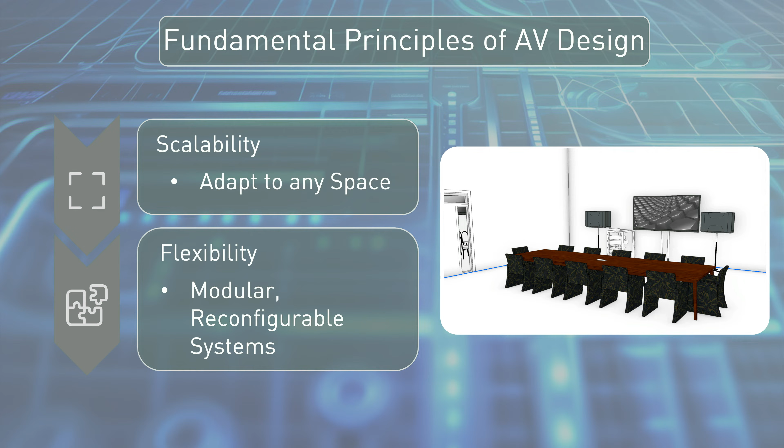When designing AV systems, two key principles stand out: scalability and flexibility. Scalability means systems must adapt to different needs and environments. For example, a facility with multiple rooms and configurations might need setups that work for both small gatherings and large services. Flexibility is about creating modular systems. This allows components to be easily added, removed, or reconfigured as needs change. For instance, a hotel ballroom might need different setups for a business conference versus a wedding reception. The focus is on creating an engaging, cohesive experience. This means ensuring all components, audio, video, and lighting, work together seamlessly regardless of the event's scale or nature.

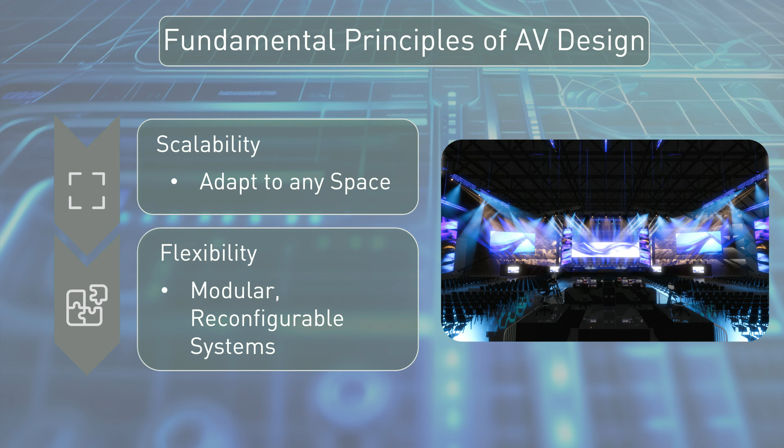An AV system typically includes three main components: lighting, video, and audio. For a seamless user experience, transitions between these components are crucial. This is where timecode can come into play, ensuring all elements are perfectly synchronized. The goal is to create a unified experience where no single component draws attention to itself unless intentionally designed to do so. In some scenarios, these systems may include custom elements like automation or the ability to broadcast and network out of the room they originate.

The design process starts with understanding the client's vision and goals. This involves in-depth discussions about what they want to achieve. Is the priority the best sound quality possible, or is the visual impact more important? Once the vision is clear, designers consider how the content will be consumed. Is it for an in-person audience, or will it be broadcast? This affects decisions about camera placement, lighting design, and audio setup.

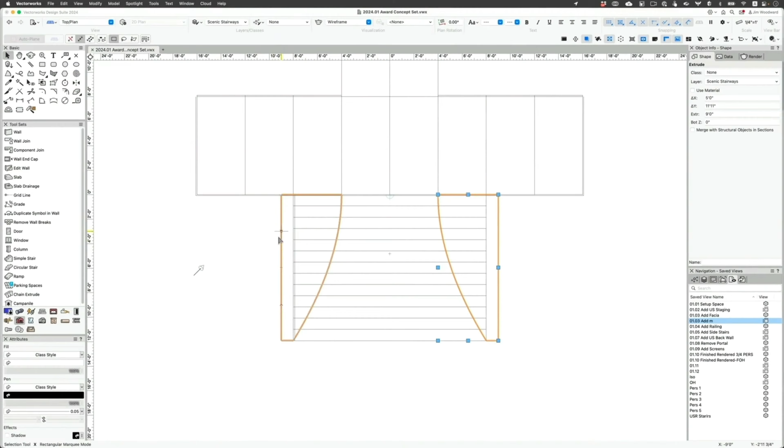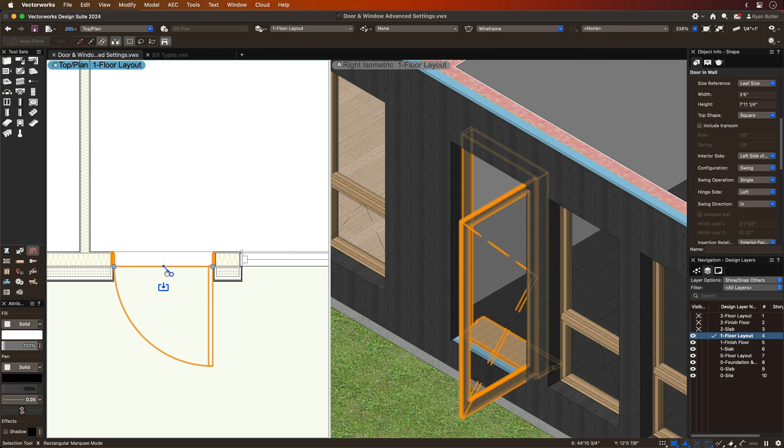In the AV design industry, professionals use a variety of software tools for visualization and documentation. Designers often work with multiple collaborators across different design and documentation platforms. For example, Vectorworks is a comprehensive software that offers robust tools for 2D drafting, 3D modeling, BIM, and rendering, catering to the needs of many types of designers across many disciplines. Vectorworks offers a hybrid 2D/3D environment that allows for precise planning and visualization. One of its key strengths is the ability to import and export IFC, Industry Foundation Classes, data, enabling seamless collaboration between architects and other design professionals. This ensures that AV systems integrate smoothly with the overall building design.

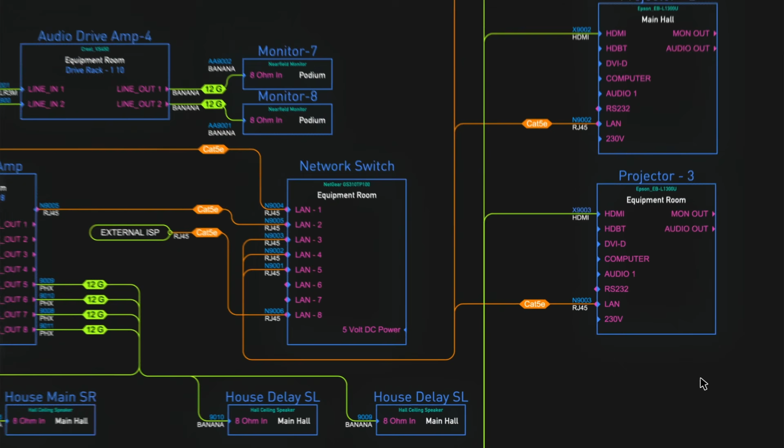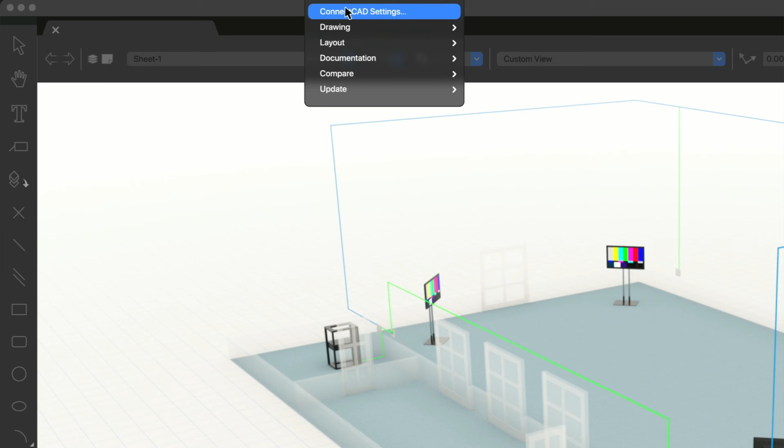For systems integrators, the ConnectCAD add-on in Vectorworks Spotlight is particularly valuable. It can generate essential paperwork and schematics, streamlining the documentation process. ConnectCAD also leverages certain IFC data, allowing for detailed system designs that account for the building's structural and spatial constraints. The design process is ongoing and collaborative. It involves frequent discussions between the designer, the client, and the systems integrators. This teamwork ensures the final product matches the client's vision, is technically possible, and stays within budget.

To stay current, professionals attend trade shows, read industry publications, and network with peers. This helps them to adapt to new technologies and trends in AV design, which are constantly evolving. The AV industry is always changing, but the core remains the same: enhancing human communication through audio and visual means. Being a proponent of your craft is crucial. Find 2 or 3 other people in your same area of expertise and start communicating. Discuss what's challenging, what's easy, and share your discoveries. This collaboration helps prevent reinventing the wheel and fosters growth in the industry.

That's a quick overview of AV design and systems integration. Remember, AV design is about creating engaging experiences by integrating different systems seamlessly. Whether you're beginning your career in AV or seeking to expand your knowledge, understanding these fundamental concepts will help you navigate the complex and dynamic world of audiovisual design and integration.